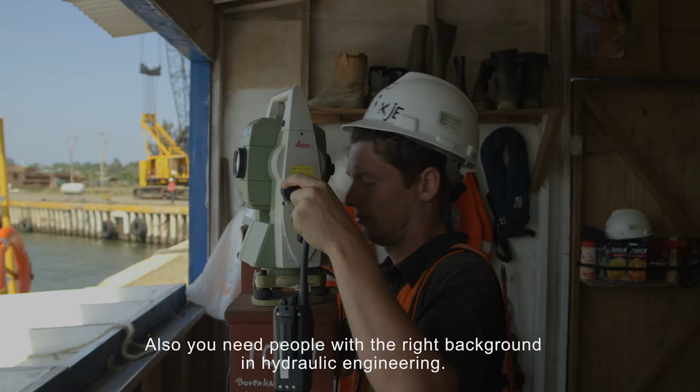My name is Alex van Schie. I work for Volker Construction International and I'm a specialist for marine works. On the project in Mexico, I am the operation manager. Immersing a tunnel is a specialist job. It's something you won't learn in the time of one project. Also, you need people with the right background in hydraulic engineering. You have to know about water.

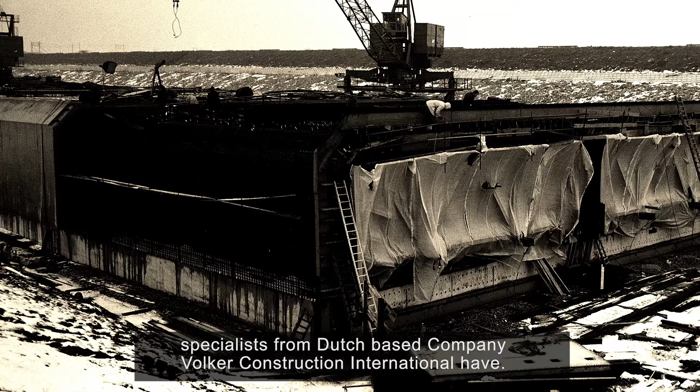And knowledge about water is exactly what the specialists from Dutch-based company Volker Construction International have. They have been specializing in building and immersing tunnels since World War II. They come from a country which is built in a river delta, densely populated areas where the rivers are crossed to commute and are used heavily for transporting goods. In these populated areas, immersed tunnels are an economically interesting solution for a good transport system that supports economic growth.

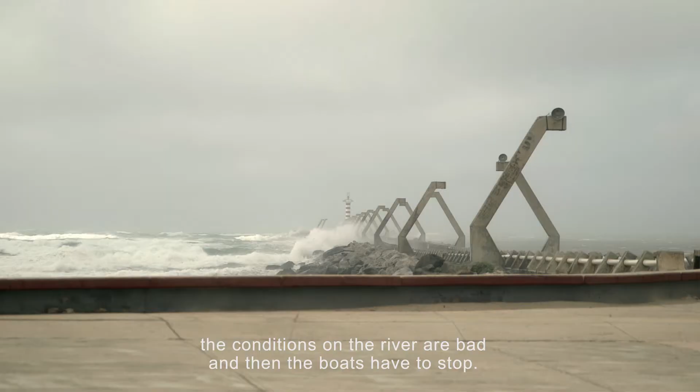In Mexico, we see a similar situation. The immersed tunnel will connect the densely populated city of Coatzacoalcos with Allende, thereby ensuring a 24/7 all-round connection with the petrochemical industry. Yeah, people can now cross the river via a bridge, but the way to Pemex via the bridge is almost 40 minutes by road because you have to go outside of the city and then all around to Pemex. The alternative is to go by boat, but in half of the year the conditions on the river are bad and then the boats have to stop. So in this case, in a populated area, you can construct a tunnel, so you can construct a connection very close to the river banks.

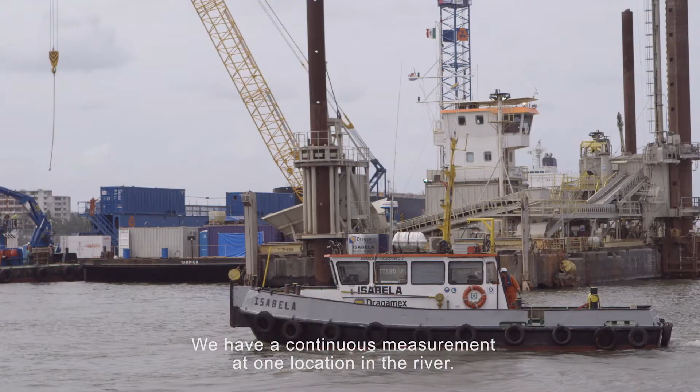To determine the exact location of those connections, of the tunnel's final position, and to determine the best moments for immersion, the team has to rely on data. Lots of data. Well, we have a continuous measurement at one location in the river, and we measure with our boat, the Isabela, depending on the tides, sometimes 3 times a day, sometimes 12 times a day, day and night, to get exactly the information on the critical point in the tide that we want to have.

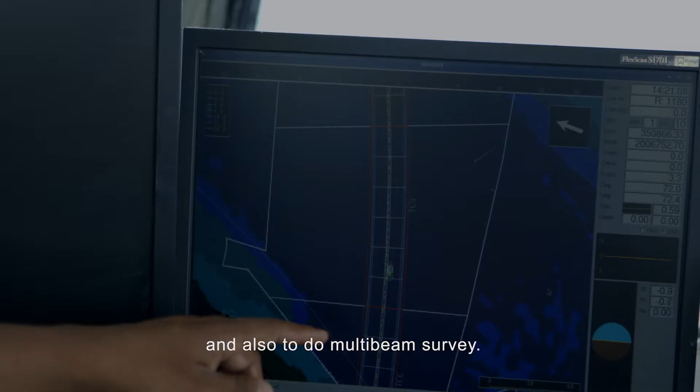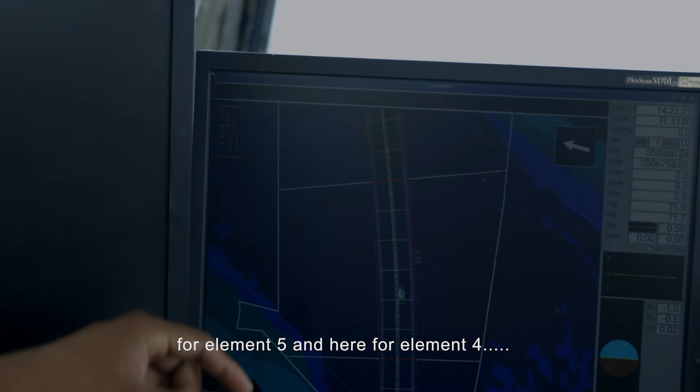This boat we use for measuring the current and also to do multi-beam survey. Here you can see the trench of the tunnel. This is divided by element. Here we are sounding the area for element 5 and go for the element 4 in this area. All of the survey works are executed by the experts of Geovisie.

My name is Erik Gijkhorst. I'm the chief surveyor on this project, the immersed tunnel in Coatzacoalcos, Mexico. From a technical point of view, it's a real challenge. We are doing the whole survey works, measuring the elements or determining the size of the elements in the dry dock, providing the measurements for installing the gravel bed, and after that installing the tunnel element itself. So all the combinations and all the different disciplines, that's the challenge.

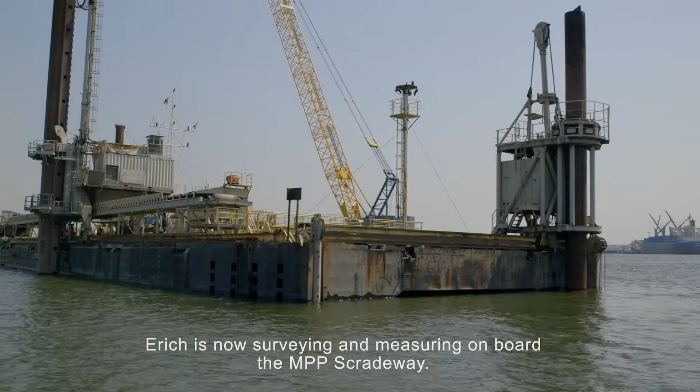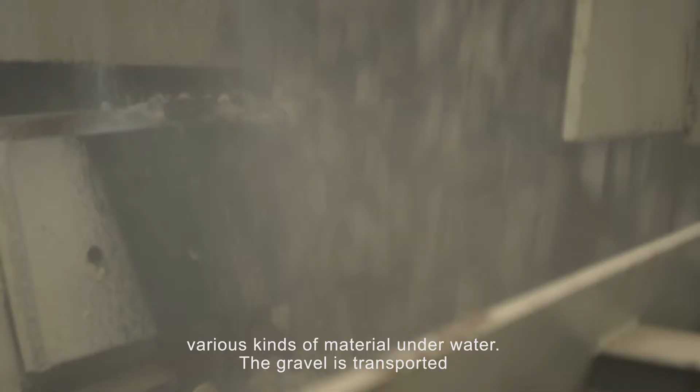Erich is now surveying and measuring on board the MPP Scradeway. This enormous vessel is especially designed to deposit and level out various kinds of material underwater. The gravel is transported up to a large fall pipe that moves alongside the pontoon and uses the survey data to deposit the gravel at the correct height and position.

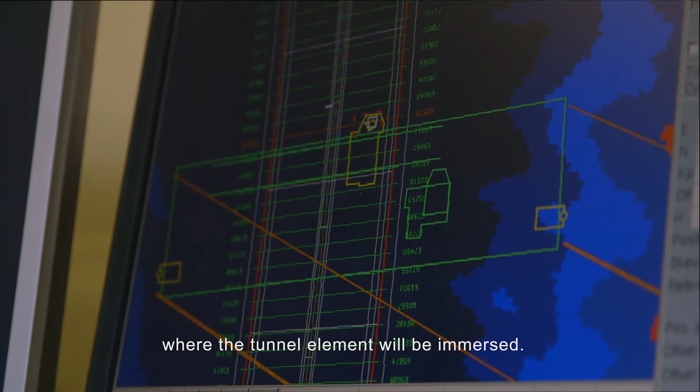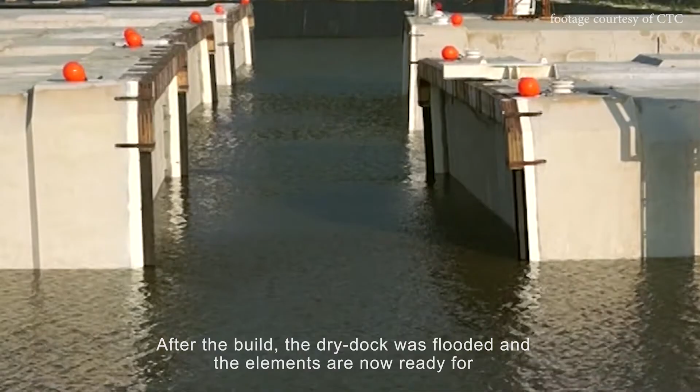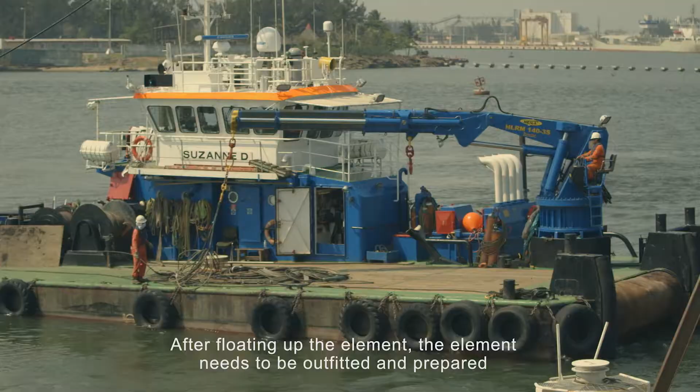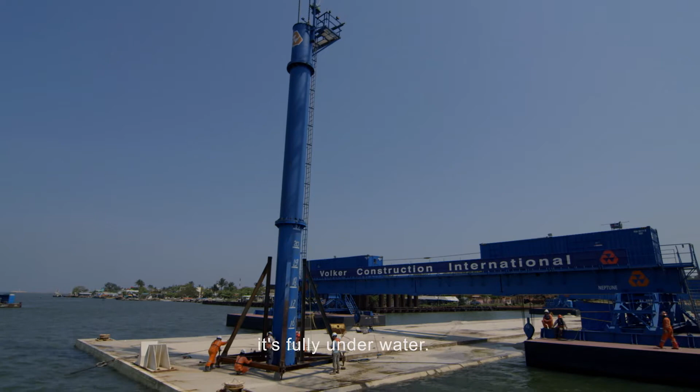These tunnel elements, a total of 5, were built in a specially made dry dock near the immersion site. After the build, the dry dock was flooded and the elements are now ready for the outfitting and transport operation. After floating up, the element needs to be outfitted and prepared for the actual immersion. This is mostly done at a temporary parking location. Here the team installs the access shaft that is needed to enter the element when it's fully underwater. They also fit the tower that holds the survey equipment and several other immersion facilities.

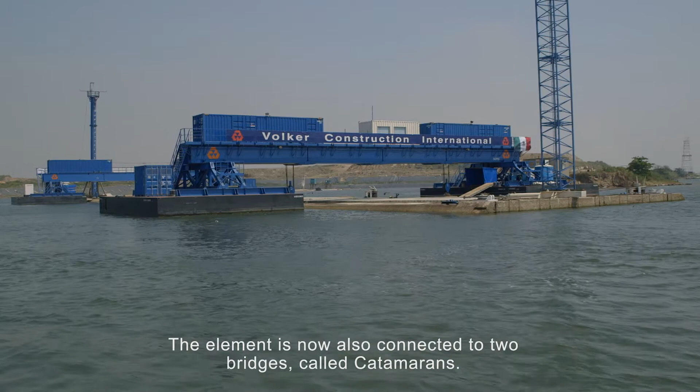The element is now also connected to 2 bridges, called catamarans. The containers on these 2 bridges hold the command post as well as the 4 winches. The catamarans are used as cranes, vertical winches that in a controlled manner can lower the element to the bottom of the river.

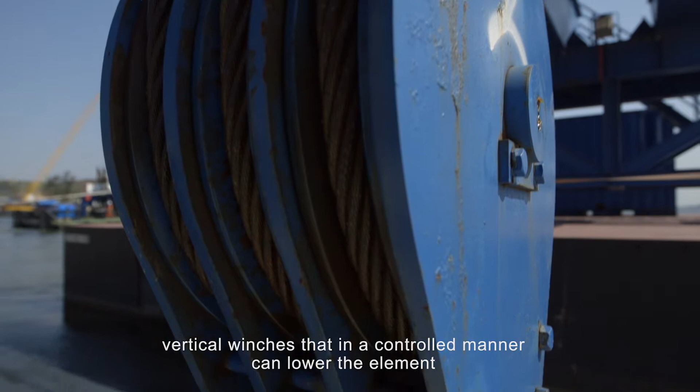As the crowd gathers and politicians are flown over the site, the outfitting of the element is finished and the element and its catamarans will be transported to the final immersion location with the help of tugboats and local pilots. The elements weigh over 30,000 tons each.

Moving and controlling such a big mass of dead weight is quite different than steering an oil tanker with a rudder and an engine. It takes a long time before it starts to move and it takes a long time to stop. In command of this operation is Yuri Vinks.

My name is Yuri Vinks. I work for Volker Construction International as a marine superintendent. It's the 3rd tunnel I've been involved with. I've done one in Norway, in Oslo, then the Tyne Tunnel in Newcastle, and now this tunnel in Coatzacoalcos, Mexico, with 5 elements.

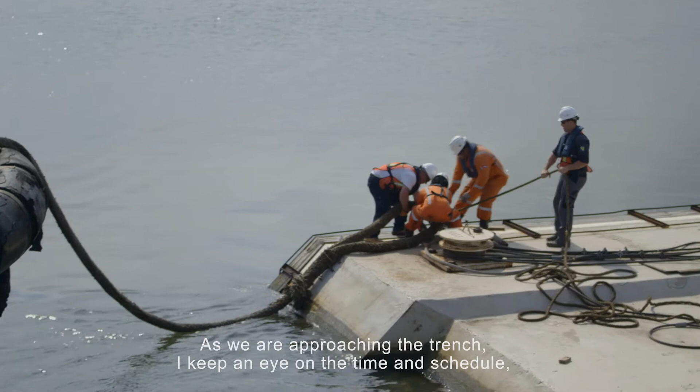But as we are approaching the trench, I keep an eye on the time, on the schedule, and also keep an eye on what all the other people are doing. The team is on a tight schedule because they have to get to the immersion location at the time that the tide and current will have the least influence.

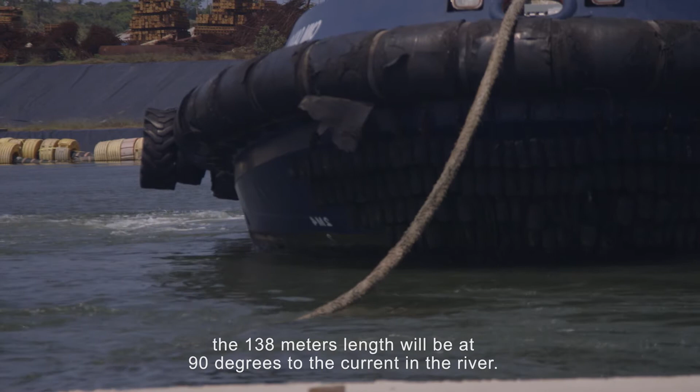Because when the element is turned in position for immersion, the 138 meters length will be at 90 degrees to the current in the river. The full force of the river will try to push the element away and out to sea. 30,000 tons, controlled only by 3 tugboats.

During his command of this operation, Yuri is accompanied by the team's Nestor, Leen de Jong.

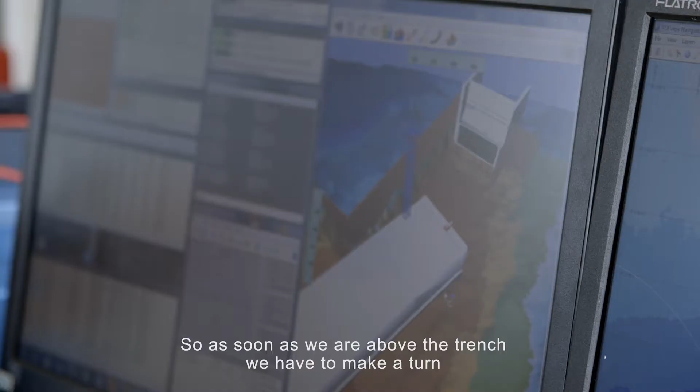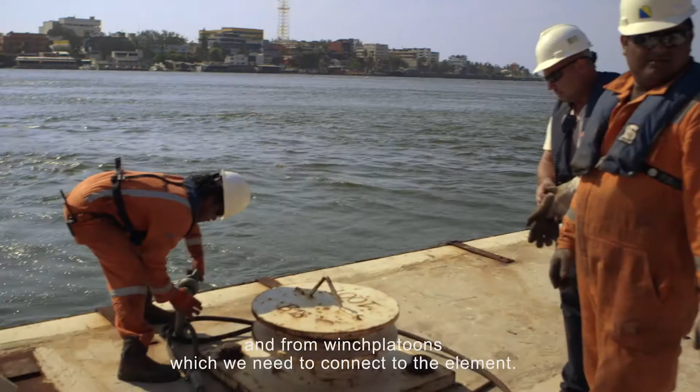So as soon as we are above the trench, we have to make a turn, and then we are in line with the other tunnel elements, and then we pick up wires, winch wires from shore and from winch pontoons, which we need to connect to the element. I keep an overview that the sequence of connecting the wires is the right sequence.

Or just connect that one with the shackle on here, so we can lift it off.

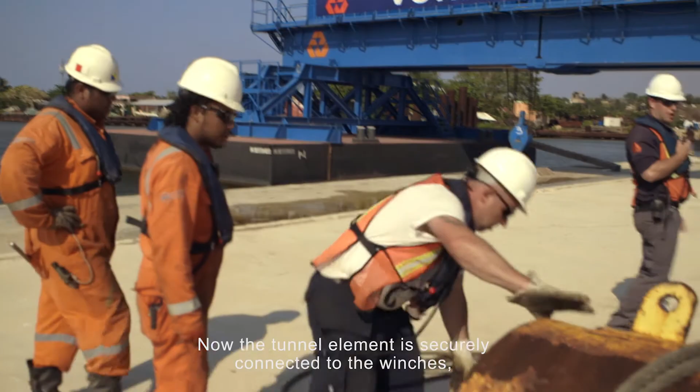Now the tunnel element is securely connected to the winches, it's time for the local pilots to leave and to remove the transport rigging and protection of the element.

And we are happy, like pilots, okay? Because everything was okay, it's going okay. I'm very happy. First time to move this kind of structure, a new experience, okay? Thank you. Thank you.

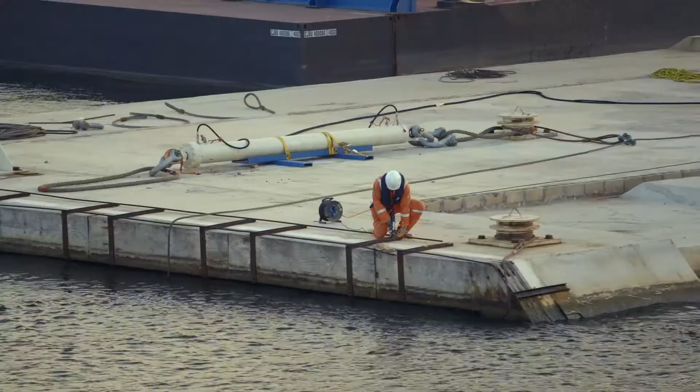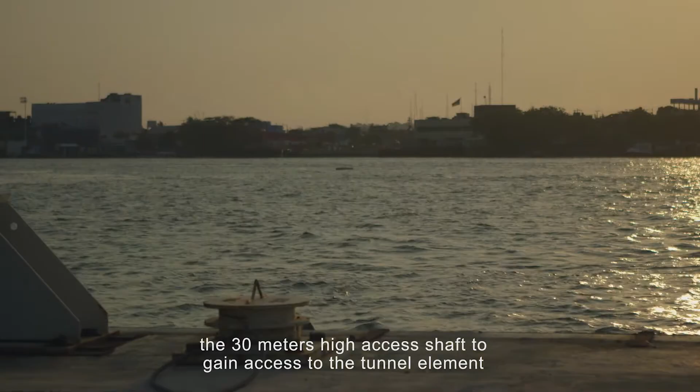Yuri does one final check, and then he and his team climb up the 30 meters high access shaft to gain access to the tunnel element and start the actual immersion.

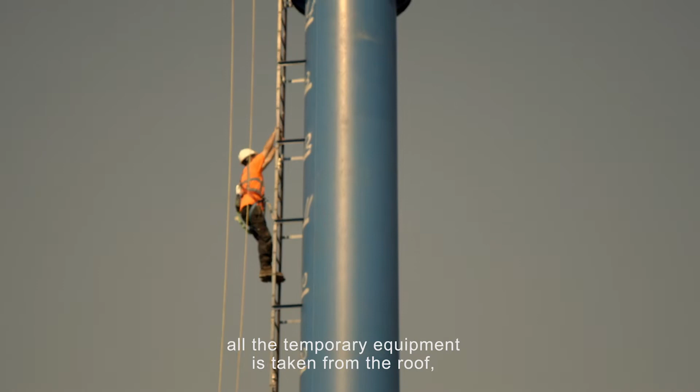As soon as all the wires are on and everything is taken from the roof, so all the temporary equipment is removed, then we go up into the access shaft and then we go inside the element.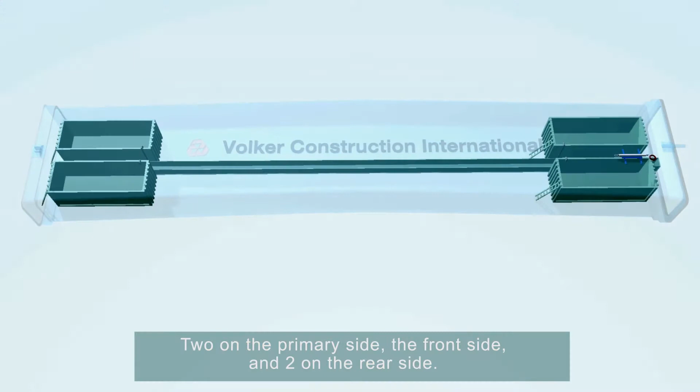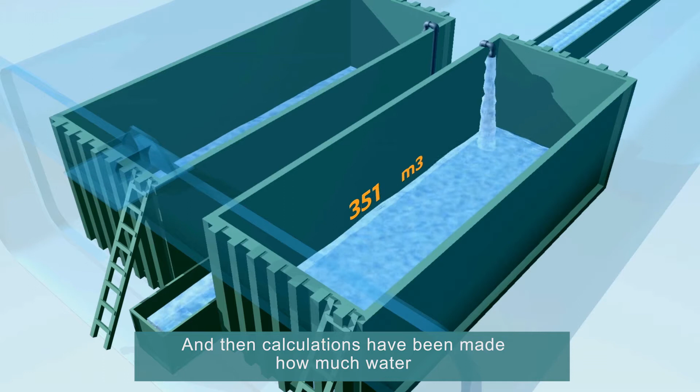And inside the element there are 4 ballast tanks, 2 on the primary side, front side, and 2 on the rear side, which can contain approximately 351 cubic meters of water each. Calculations have been made of how much water should be in the tanks to get it on the bottom of the river. It's all depending on salinity of the water and also the weight of the element.

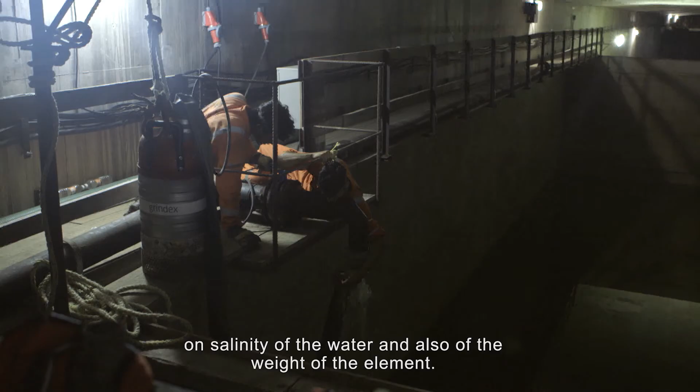So what we do, we open the valves inside the element and we fill the tanks to a level that we agree.

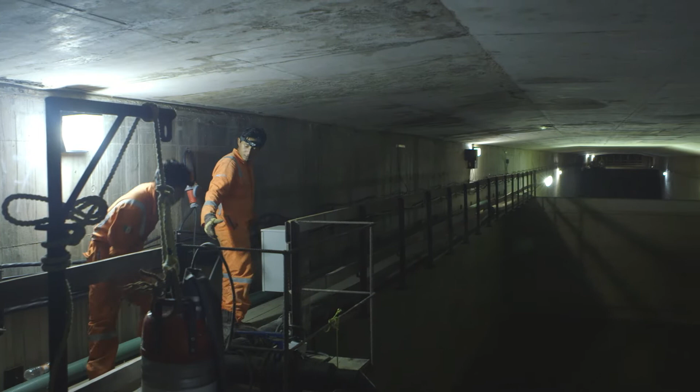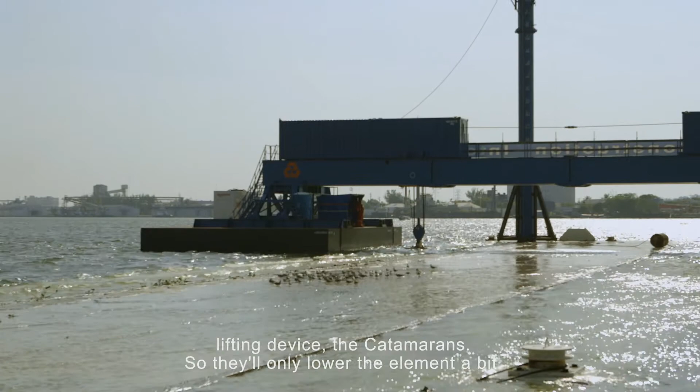In the meantime, they will lower the element a little bit because otherwise you get too much tension on the lifting device, the catamarans. So they lower it a little bit, and at a certain moment there's just enough water in it to make it sink a little bit.

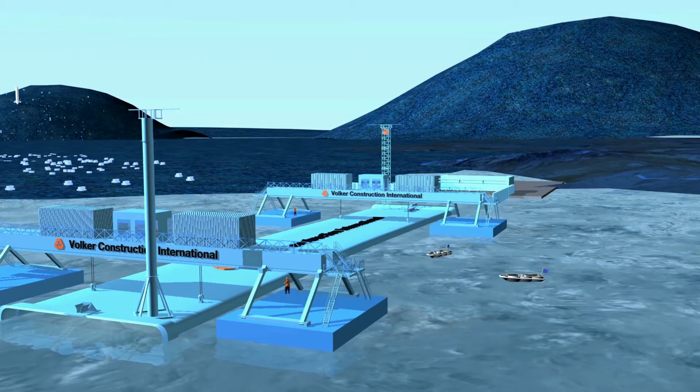Outside, on the two catamarans, are the two winch operators. Based on the data from the surveyors, the ballast tanks and the force in the winches, Operations Manager Alex will give them orders to lower or lift their side of the element.

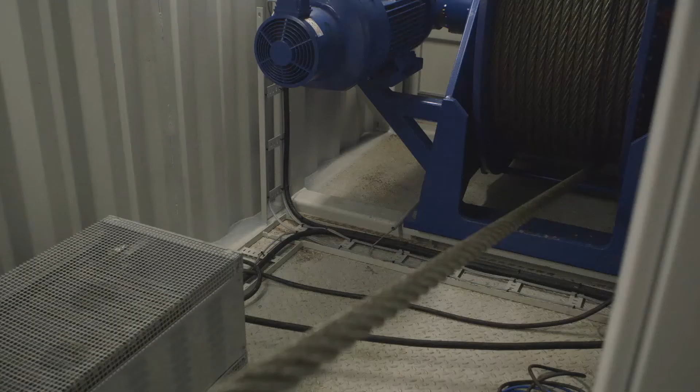In the next few hours, the element is carefully lowered in several steps of half a meter up to a meter, until the element touches the gravel. During this immersion process, the winches on shore will slowly pull the element closer to the previous element.

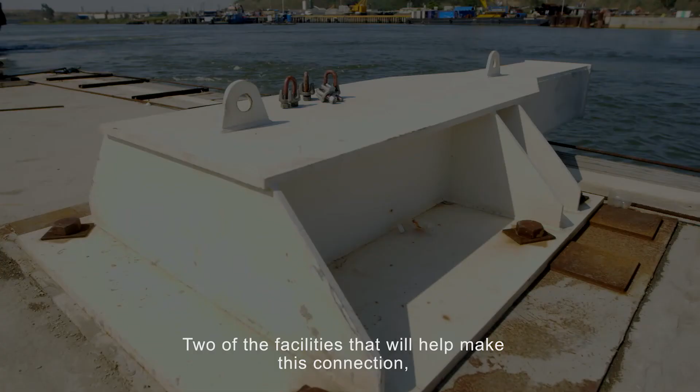Two of the facilities that will help make this connection are the catcher and the pin that have been installed on the element. The catcher will guide the pin and tunnel element in the last centimeters and allow the front end to align as planned.

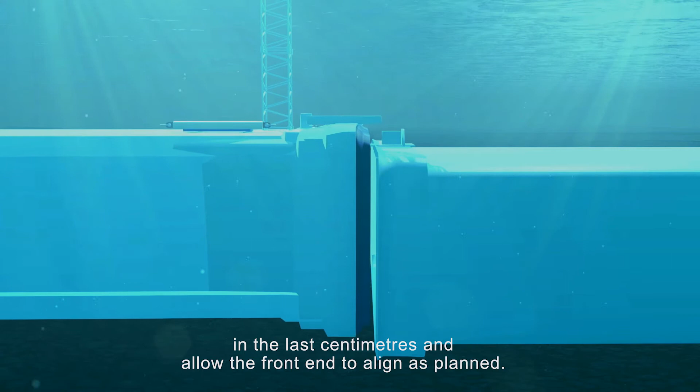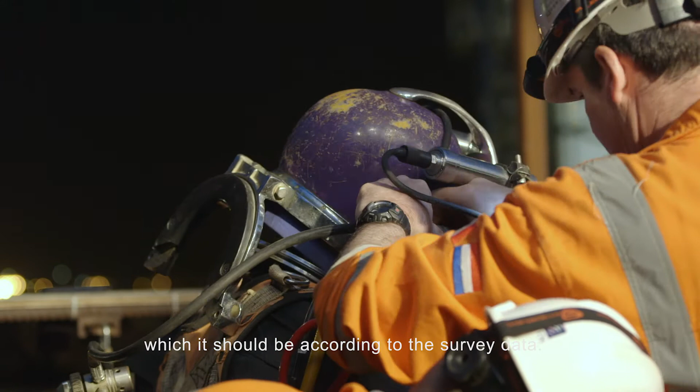Okay, update for all winch operators. We are preparing a dive to check if the pin is above the catcher, which it should be according to the survey data. So all winch operations are on hold until the dive inspection is over.

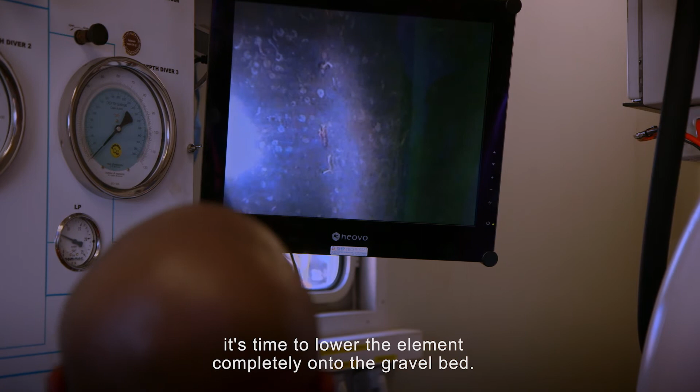Now that the dive inspection has confirmed the survey data, it's time to lower the element completely onto the gravel bed.

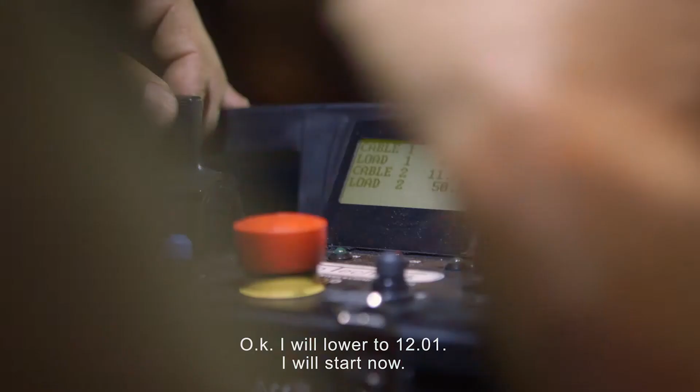Menno, can you please lower both blocks 20 centimeters again? Ready for start.

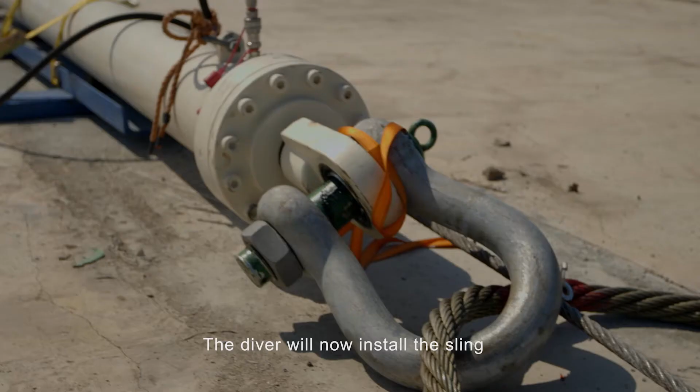That is why the diver is now preparing to go in the water. I ask you to stand by and wait for instructions after the diver is ready. The diver will now install the sling of the pulling cylinder.

This hydraulic cylinder, mounted on the element, will pull the element to the previous element with a force of 100 tons, making the two sides connect for the first time and compressing the first centimeters of the so-called rubber Gina profile.

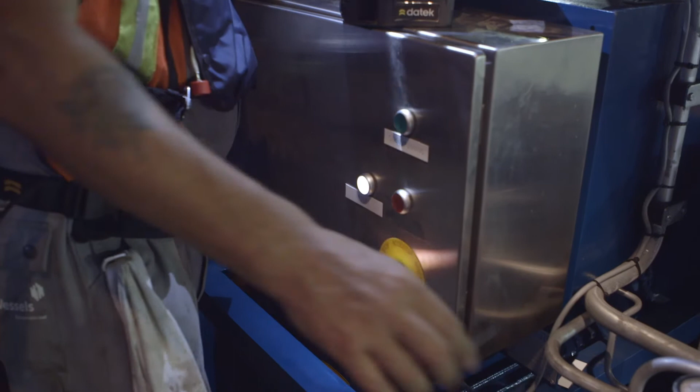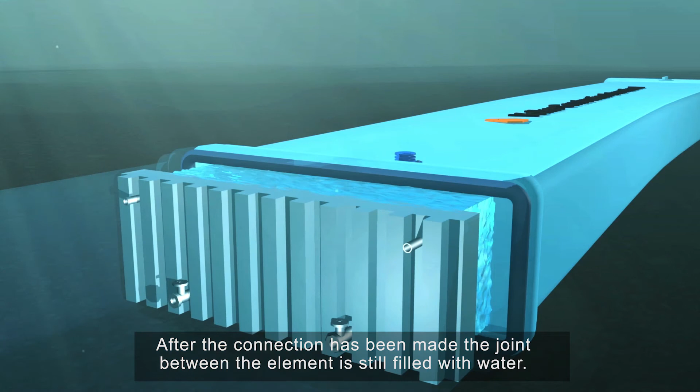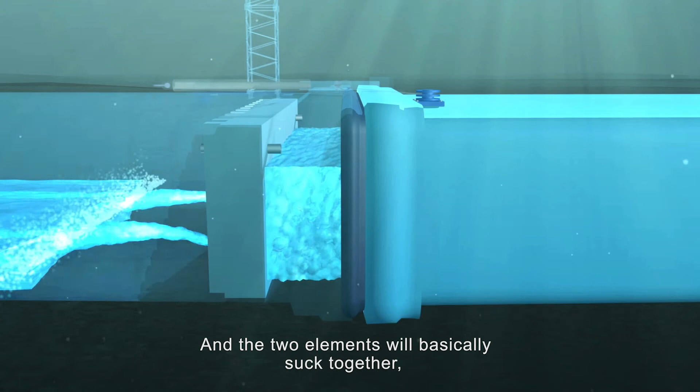After the connection has been made, the joint between the elements is still filled with water. A team of 4 people on each side will open all valves to drain the water. This will create an underpressure inside the joint, and the 2 elements will basically suck together, compressing the rubber Gina profile and creating a first completely watertight connection.

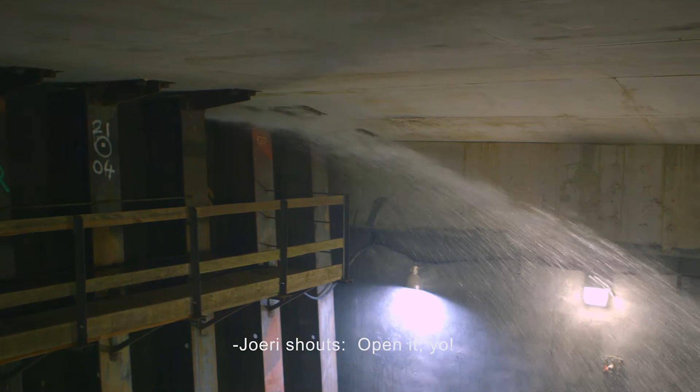That's one of the nicest moments, when you see the water coming out from the vent pipes close to the roof. And when you see the water coming out, it's first, like, spraying for say 20 meters far. And then after a minute or two, the pressure gets less and you see the water dropping down, and you know, okay, we made the connection, it's watertight. And then you're basically really happy, because that means you have made the connection, the element is on the bottom and it will stay there.

Okay, it's on! I did. It's tight. You did the trick. It's closed. I will put an element on the bottom of this river.

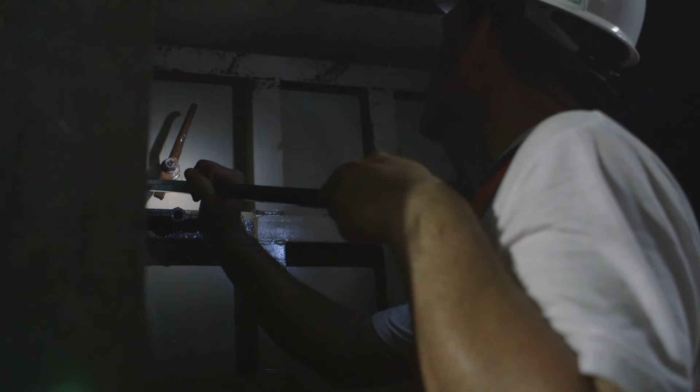Well, it is always a race who opens the door first. Yeah, I really want to be the first one to bang on the other door so that they know I've already opened it and that we are there. Reaching all the way through. Still too much, I want to try from this level. I'm gonna try from this level, okay? You can hang up here? Yeah, definitely. Should do it nice and easy, but right. I knew you couldn't, I knew you couldn't win. Yeah, sometimes you end up being a little bit wet, but that's part of the fun.

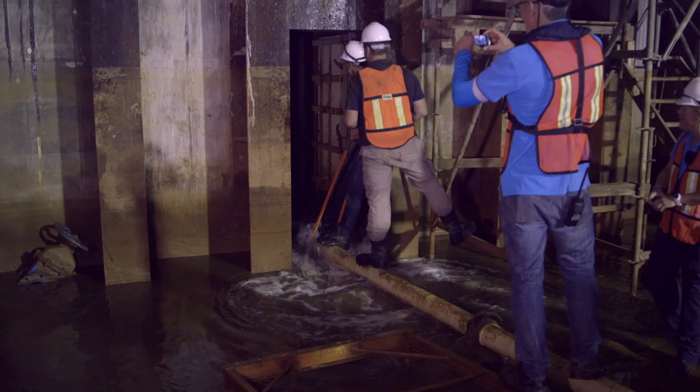Okay, it's yours again, Adrian. Thank you, it's not nice. I'm going to send some pictures. Welcome, welcome, thank you very much for the job.

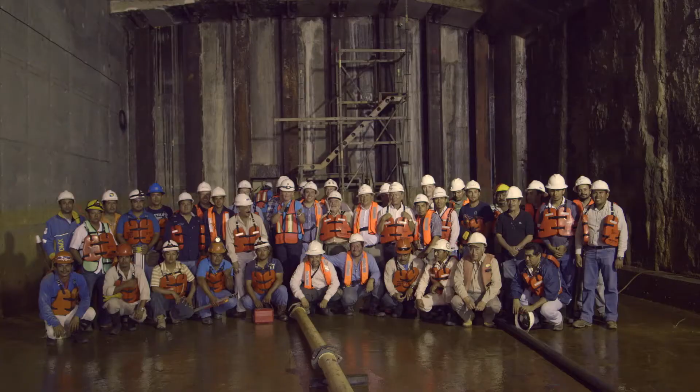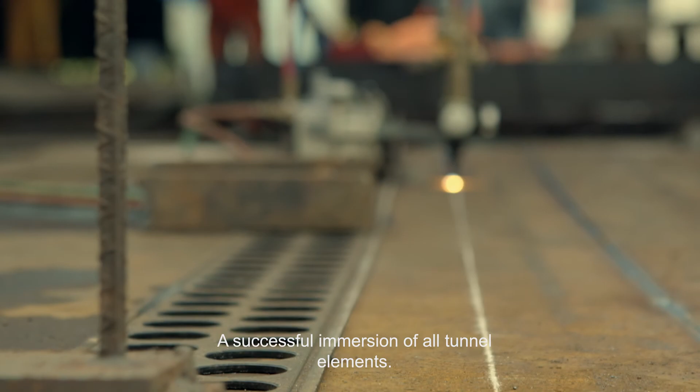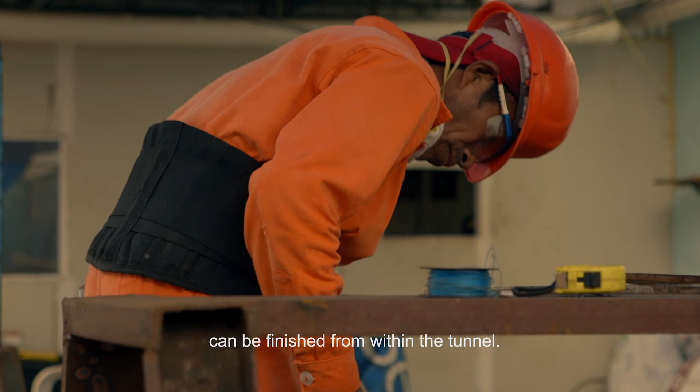A successful immersion of all tunnel elements. So now it's time for the closure joint to be constructed. The formwork you see constructed here will be fitted by the divers, so the joint between the ramp and the final tunnel element can be emptied, and the concrete construction works of the joint can be finished from within the tunnel. To keep the tunnel in position and safe from damage, 3 layers of filling are used.

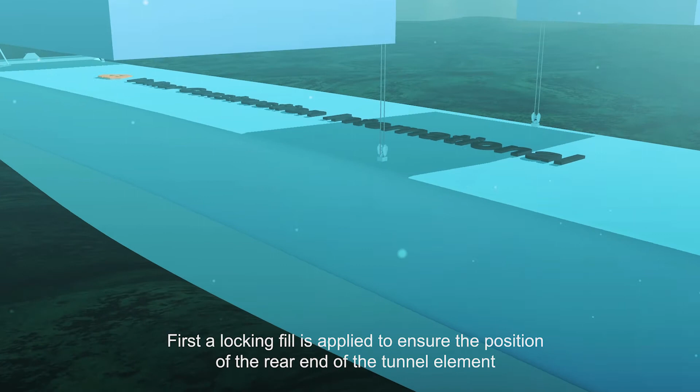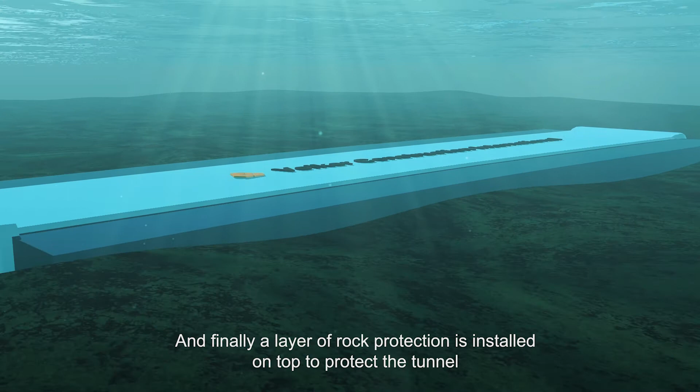First, a locking fill is applied to ensure the position of the rear end of the tunnel element that has just been immersed. Second, the trench to both sides of the tunnel is backfilled. Finally, a layer of rock protection is installed on top to protect the tunnel from being damaged by falling or scraping ship anchors. After finishing the interior, the Mexicans will now have their secure connection from Coatzacoalcos to Allende, and this image will be one of the past, thanks to the specialists of Volker Construction International.